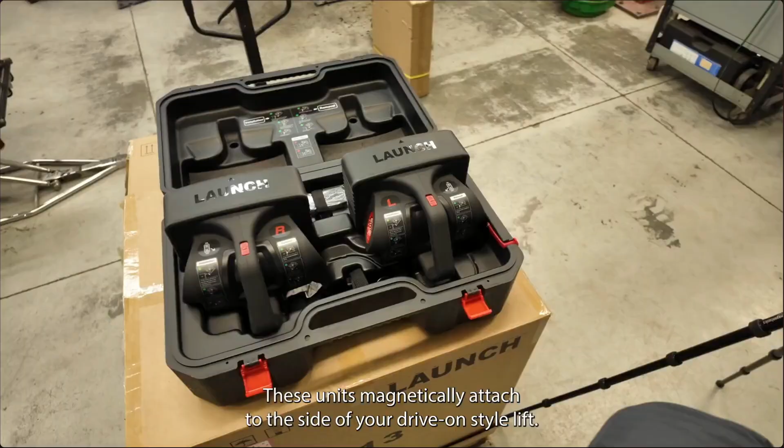Today, we're unboxing the Launch X613 mobile wheel aligner, which comes packaged together in 3 boxes. The first box contains 3 parts. First, we have the hard case with the main unit. These units magnetically attach to the side of your drive-on style lift. They are self-calibrating and wirelessly connect to your Throttle 3 or 5 tablet.

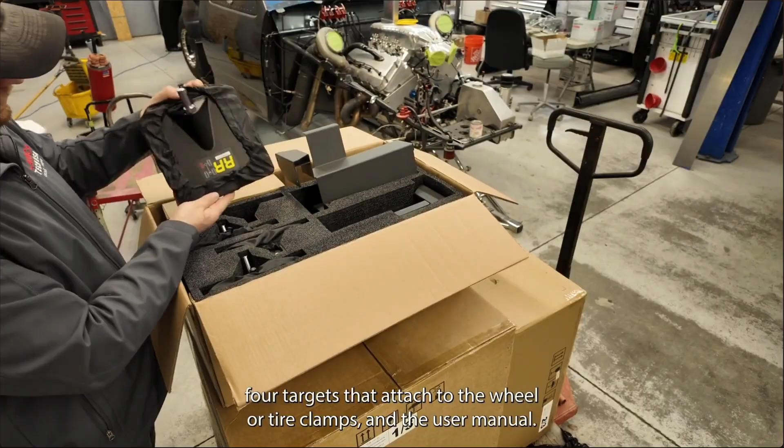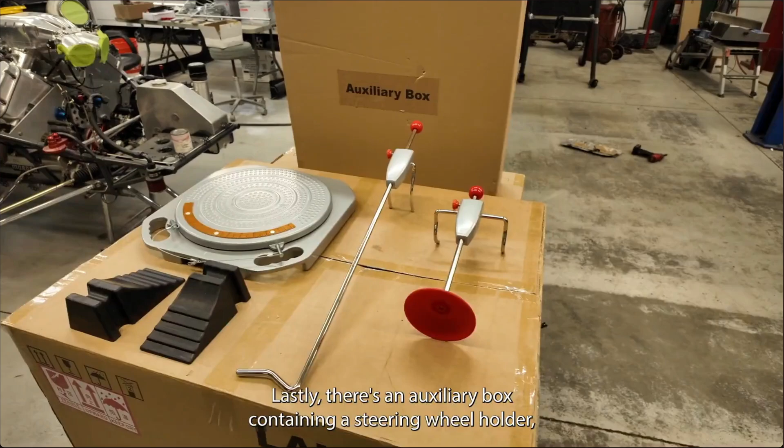The next part contains wall mounts for the camera units, 4 targets that attach to the wheel or tire clamps, and the user manual. To wrap up our first box, we have our tire clamps with 2 size adapters and corresponding wall mounts. Inside the second box, we have the wheel clamps with their corresponding wall mounts. Lastly, there's an auxiliary box containing a steering wheel holder, brake pedal depressor, wheel chocks, as well as the 2 turn plates. Now, let's talk about what makes the X613 stand out.

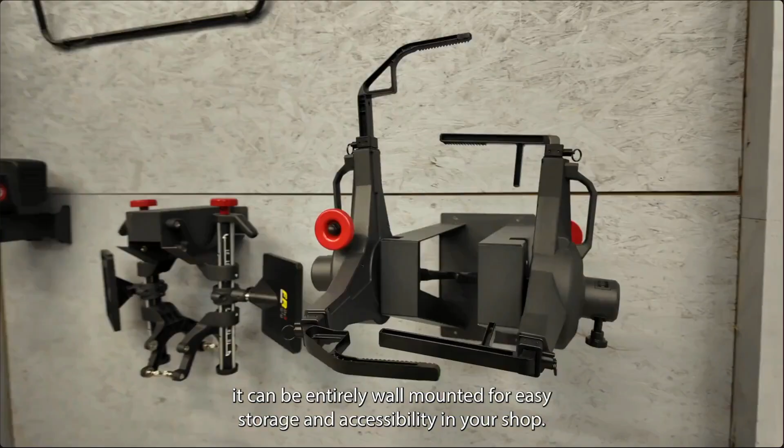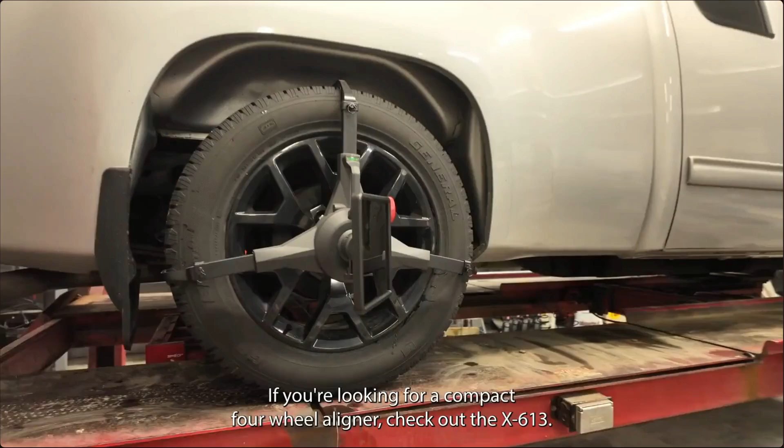When not in use, it can be entirely wall-mounted for easy storage and accessibility in your shop. Easily put away the main camera units, wheel clamps, and tire clamps. Alternatively, the main unit can be stored in its hard case designed for easy wiring, so you can continue charging it even when it's put away in its case. So, there you have it. If you're looking for a compact 4-wheel aligner, check out the X613.

So as you see, that unit comes with pretty much everything you need to do an alignment. It comes with two cameras, one for the left side, one for the right side. It comes with two sets of clamps. It comes with four rim clamps, also referred to as 4-point clamps. They have the clamps that grab onto the edge of the rims, and then it comes with four tire clamps, also referred to as 3-point clamps.

Comes with four targets, the mirrored targets, just like you see on other alignment machines, that go at each point of the wheel, the right front, the left rear, and vice versa. And they're marked accordingly because they have to go in a specific spot. In addition to that, it comes with two turntable plates, and it comes with a steering wheel lock and a brake pedal depressor.

It also comes with the Throttle 5 scan tool, which by itself is a $5,000 tool. It's our top of the line scan tool, which runs the mobile aligner. You have to use a Throttle 5 with this unit. You can't use any of the other scan tools that we sell. It has to be a Throttle 5, and the reason for that is the Throttle 5 has dual band Wi-Fi, so we have two channels of Wi-Fi on there.

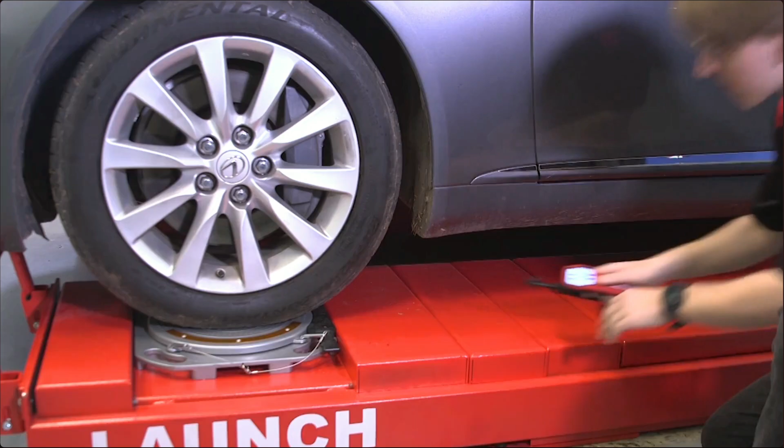He's going to show us a little bit of a tool here. This tool is for checking tire depth. So we're going to go ahead and do a tire depth check. Go ahead, Harrison, let's start it off if you would. Harrison's going to start off with the left front tire, so the driver's front, and he's going to quickly get us information on all of the tire tread depths very rapidly, and we're going to integrate it into the tire report.

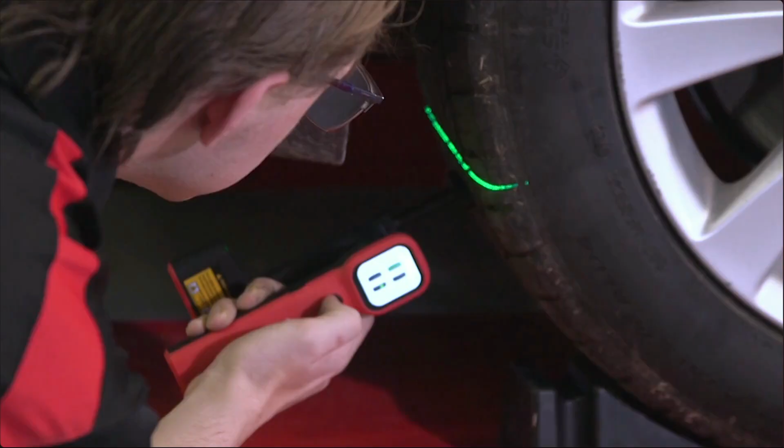Now remember, an alignment problem doesn't always show up as tire wear, but it definitely can. So looking at the tires will give us a good idea if we have a scenario where we need to do an alignment. And now we're going to get ready to start with our alignment. So Harrison, if you'd come over here real quick, we need to identify the vehicle first, of course, because you can't remember all the alignment adjustments.

So Harrison, if you would, let's pick this vehicle. Asia, if you notice, he picks. And then he's going to pick the Lexus that this is. So he's going to scroll down to Lexus. Notice how easy it is. Then he's going to pick the right Lexus model of this particular vehicle. He's doing that right now and picking, of course, the year. Now that will be implemented into the service report.

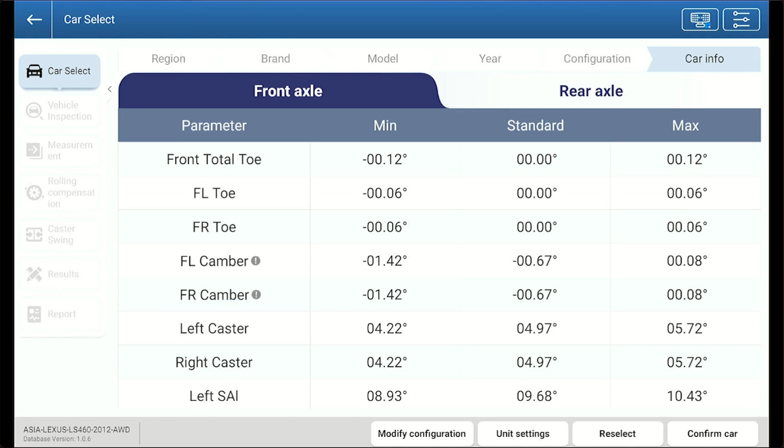So the service report itself, when we're done here, is going to show the type of vehicle. So is it an all-wheel drive? Absolutely. We're going to confirm the car. Here's all the alignment measurements, as you can see on the screen, including diagnostic angles. Now, we then have tire inspection right over here. So let's go over into tire inspection.

We're going to hit next, and we're going to import the information from our device that measured the tire. If you notice, it's populating from our test. So all of our tire depth information, as you can see on the scan tool, has been programmed in so we can get a look at it. So we're going to hit next. So we have all of our tire information, which is great.

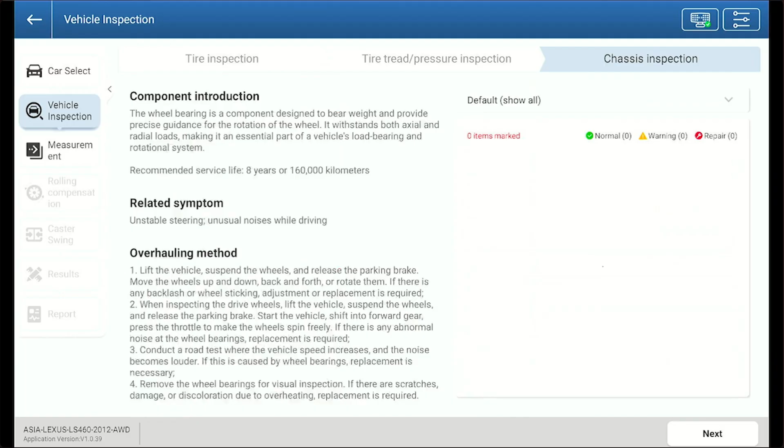We can do a complete inspection on the vehicle as far as parts and put it down in the record for the customer. We're going to go ahead and hit next in this particular case, and here's your alignment procedure.

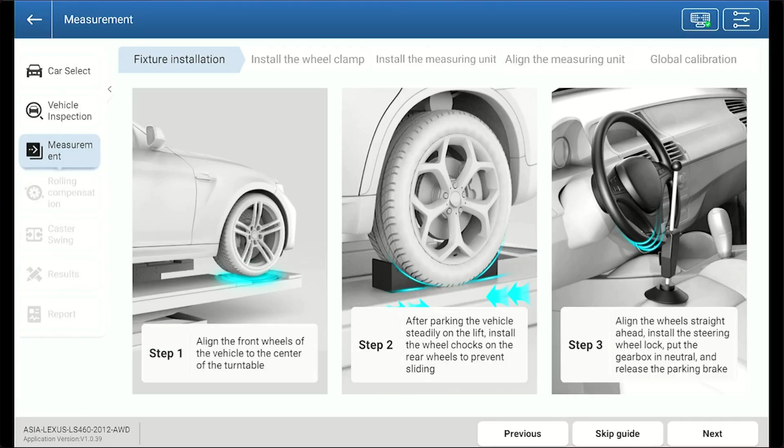Now, if we notice, the first thing is align the front wheels, so we're going to pull it on the rack. We're going to line the front wheels with the slip plates right here in the middle, and we're good there. And then we're going to, of course, go to the next step, and we're blocking the rear wheels, which has been done, and then we're going to lock the steering wheel.

So Harrison's going to grab the steering wheel lock and lock the steering wheel real quick, because we're going to go ahead and do a run-out check like all quality aligners do, but this alignment run-out check is going to be done very rapidly. So I'm going to go ahead and hit the button. Now we've got to put the targets on, and then we're going to set the run-out. So Harrison is going to get the alignment wheel clamps and the targets, and we're going to get those set up, show you how easy those are to set up.

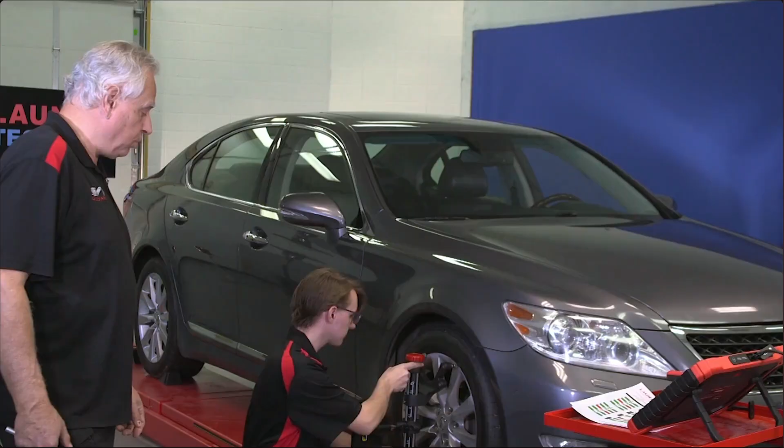So we're going to start basically with this right front over here. And if you notice, he's going to go up to the wheel. You can set the clamp to the tire rim size initially. So he's preset it, so notice how close he is. He's going to push in very hard on the clamp. He's going to have it centered straight up and down, and he's going to tighten it down. And then he's going to give it a good yank to make sure it's on there. Notice how well they fit.

He's going to go to the right rear now, and then he's going to, of course, do the other two on the opposite side of the vehicle. So we have 4 wheel clamps to put on. They're all put on exactly the same way. Now remember, there's an optional clamp with 3 positions that go on the tire. Makes it a little quicker, but this clamp is inexpensive and they work extremely well. They're very repeatable also.

And then, like I said, we're now going to take the next step, which is to put the actual head units on. And you'll be a little surprised where they hook up, because they fit right in the center of the car. Now, the nice thing about that is, of course, the beams have a very short distance to travel. Not a lot of things get in the way of the beams, so very reliable as far as that goes. Now, these sensors do not have any kind of wiring on them. There's no wire connection, there's no strings, etc.

So Harrison is going to grab the sensor that fits on this side. Harrison's going to insert the sensor. It's magnetic, if you notice. He's all set. He's going to turn the switch on. We're good. Got a green light. We're going to do the same thing on the other side. So he's putting that one on the same exact way. Once again, they're magnetic. The nice thing about this is it's a mobile aligner also. You don't have to do it on a nice rack like this one.

So Harrison, come on. Boy, you did that awfully quick there, guy.

So go ahead and hit next. So we're ready at this point. We've got the sensor on. It's telling us how to do it just to make sure we know it. If you notice, it's step by step. Tells us to make sure that we have a good path. So we're ready to go on. So Harrison, you ready to keep rolling? So go ahead. We're going to hit start calibration now. Since we've just put everything together, it's going to do a calibration to ensure that the calibration is correct. We are ready to go. So Harrison's going to hit next.

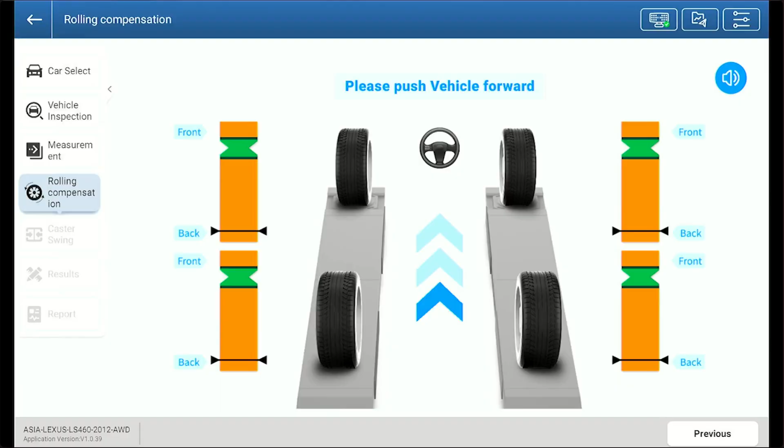So he's going to push it back to where it was, and this does a compensation to make sure that all the sensors are reading accurately as far as the position that we placed them at. Notice we're in the green area now, and it's got a check mark, and we're ready to go. He's going to put the wheel chock back in, and that is basically our rolling compensation procedure.

So now we're going to go ahead in this particular case and remove the steering wheel lock, because we're going to do a caster included angle measurement, which is very important to make sure that we're in good shape as far as this alignment goes. So we're going to go ahead and unlock our steering wheel. And when we unlock the steering wheel, we're going to go ahead now and turn the wheel.

Since we're turning the wheels, we're going to basically remove the actual pins in the good old turn plates, because the turn plates have to be able to move so that we can do an actual alignment examination. So I'm going to hit next. It gives us all the instructions on the screen, if you notice. It's telling us, please turn the steering wheel to a straight ahead position. So we want the steering wheel straight ahead. There we go, straight ahead, as you can see on the screen.

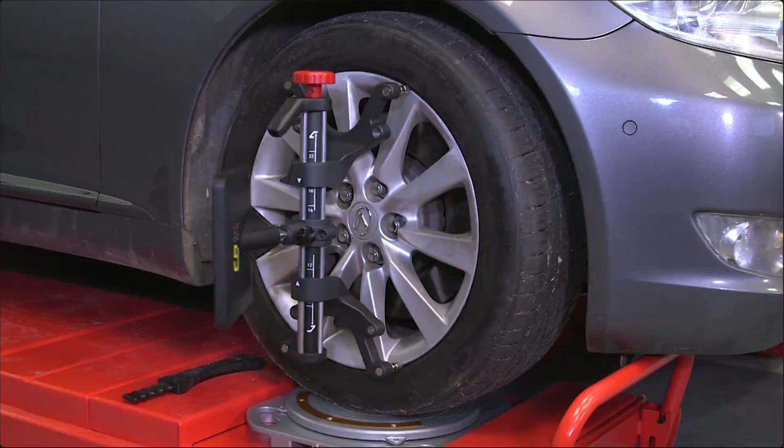Now it's telling us, please turn the steering wheel in any direction. You can pick either left or right. So Harrison's going to go all the way over to the left in this particular case. And he's going to get into the green area and go just beyond it. Now it tells us go to the right. So he's going to bring it back to the right. It's going to take the reading and then return the steering wheel to the center straight ahead position. Once it does that, we're all set there.

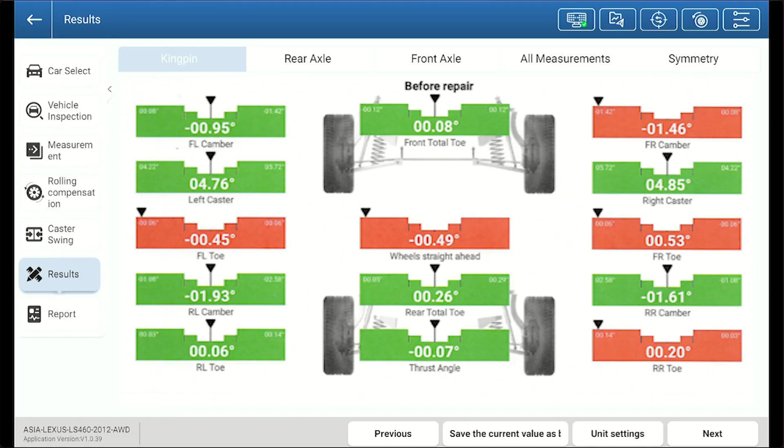And believe it or not, there's our alignment reading. There's our measurements. So we do have a situation where we need some alignment work done here. If you look especially at the right front camber angle, we've got a concern and we need to make some adjustments as far as that goes. We are ready to go at this particular point.

Harrison's done great. What do you think of your first time doing an alignment check? It was really easy. Yeah, real easy.

Now, here's the interesting thing. Harrison also hit the print button for me, and look at this. I've got the full copy of the exact alignment printout here. I know not only the alignment angles, but I also have all the adjustable angles on here, and I have the fixed angles for diagnostic purposes. I can tell if I do have a bent strut, or a frame with a problem. I can tell if one tire is set back because the car was in an accident or we hit a big curb maybe. So all of that stuff is there.

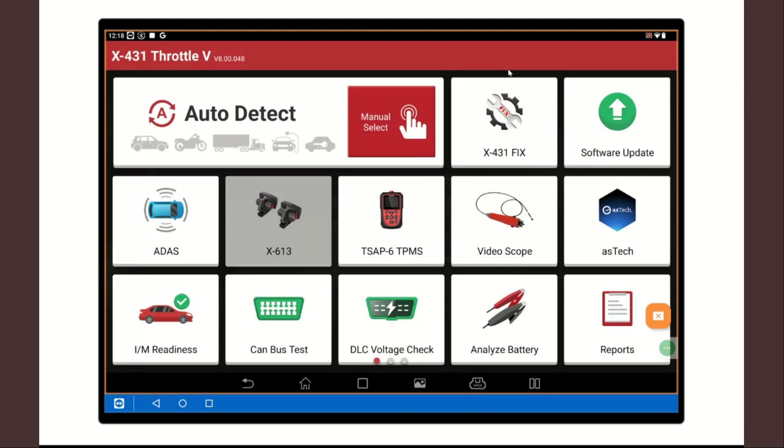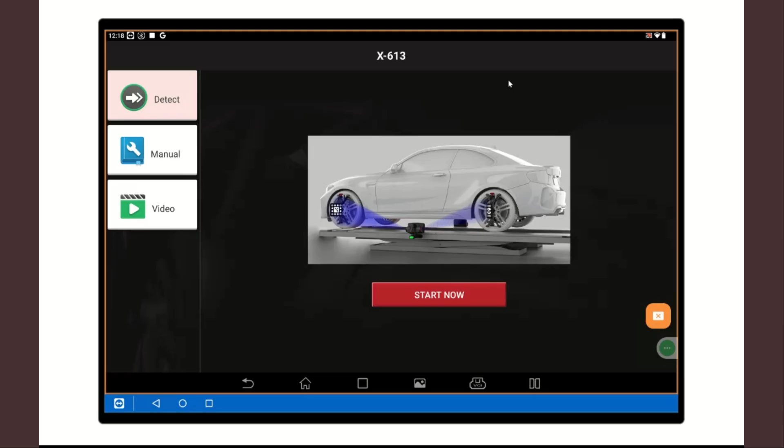So we're just going to go ahead and click that X-613 app. It's then going to load, right? And there's information in here where you can see the unit, learn how to do it through videos, enter the manual. But I'm just going to go ahead and hit start now. And I'm going to load demo mode. And that's going to take us into an alignment.

So the very first thing is selecting which vehicle you are working on. It's pretty simple. Asian car, that's your Hondas and your Toyotas, your Mazdas, and whatnot. European car, VWs, Audis, Porsches, Mercedes-Benz, BMWs. USA cars, that is literally Chevy, Ford, Dodge, and whatnot. Even if you have a truck, it's going to be listed under car. So I'm just going to click USA car.

All right, so it's going to bring up, and you'll see I have a completely unlocked tool, so you see brands that you've probably never heard of if you're in the USA up on the screen. You'll see Ford trucks, Chevy trucks, and in most cases, even in the case of an alignment, if I click under Chevy trucks and 17, you're going to see stuff that you might not consider a truck, like an Equinox. So if it's not an actual car, it's probably going to be under trucks.

So I'm going to go back here. Now cancel back to car select. So go back to demo mode, USA car. Again, multiple stuff in here. You can pick whatever brand you've got. In this case, I'm just going to click Ford. I'm going to click the vehicle that I own. Oh, there we go.

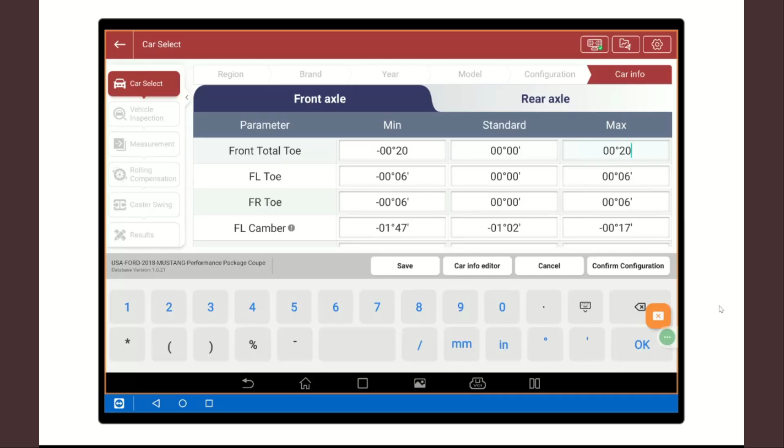Now it's 20 minutes. And I can go over to the other one and do the same thing. 20 minutes plus or minus. Maybe that's the new spec because of the work that's been done. You can then also save this. If I hit save function, and let's say this is Dave Johnson's Mustang, I can punch in Dave Johnson's Mustang, and then hit OK.

And now every time he comes back, I can go in and select that configuration, so I don't have to enter this in every single time. So pretty cool here.

And something that I learned last month: we had a customer ask us about an EV brand, fairly new to market. They haven't been around terribly long and don't have a whole lot of models, but he wanted to know if we had coverage with the aligner for that particular model. As I looked into it, we did not. It is not loaded in there yet. We're constantly adding models to the software for coverage.

But in this case, I said to him, do you have any way of knowing exactly what the specs would be? Do you have access to service information? He says, yeah. And I said, well, you can do that then, because if you go into modify configuration, you can enter all the specs in there, save it as a custom configuration, and then load that.

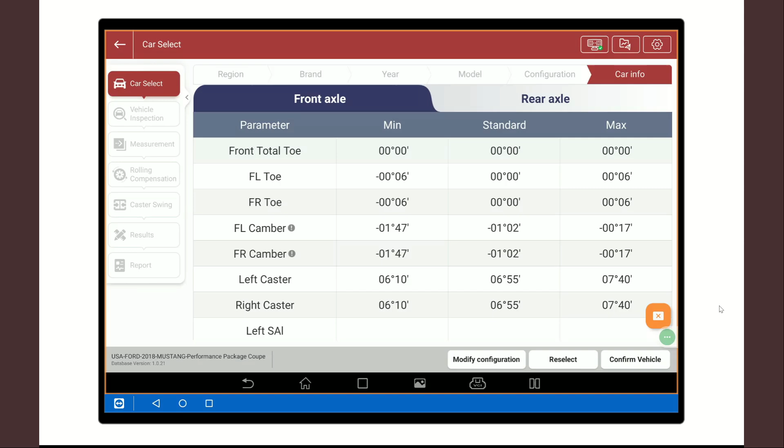And then there you go. You actually have the spec. So even if there isn't actual coverage for that particular model, if you have a way of getting the factory specs, assuming that it is not a modified vehicle, right, lowered, lifted, whatever, then you could actually go in there and do that information, right? So pretty cool. So in this case, we're just going to confirm that this is a standard old Ford Mustang.

So the next thing that comes up is kind of what some of you guys might have seen, which is, on the video Tom did, he was using the Treadmaster, where you can actually go in and scan the tires using our Treadmaster 2.0. It'll actually take tire depth readings digitally by sending an LED light through the tread pattern and then measuring the depth from the tool and inputting it into the inspection form.

You can also add pictures. Let's say it had a bubble on the sidewall, or the tire was worn so bad that you saw the steel belt, or it had a nail in the tire or something. You could actually take pictures of that and add it in to the inspection report. So, pretty important. There's no better time to sell tires, right, or suspension work, which we'll get into in a second, than when a car is in for an alignment, right, and make sure that everything's good.

Now, let's say you don't have the Treadmaster. You can actually go in there and just enter this stuff in manually. If you're just using an old manual gauge, right? I got one actually sitting right next to me right now, just an old school, 32nds of an inch manual gauge. You go in there, you can change the number of grooves that you see.

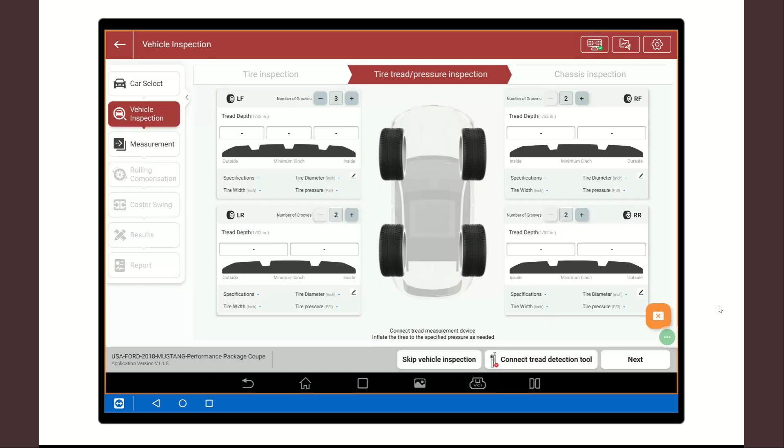So, most people want to do outer, inner, center, right? But let's say you're working on a bigger truck that had steer tires with four grooves in it. You can change the number of grooves that you're looking at. You can do all this kind of stuff to it, right? Manually enter that in and then hit next.

Now it brings you up to a chassis inspection, right? Anybody that does alignments knows you need to do a proper shakedown, right? You need to shake the vehicle down, check it for ball joint play, check it for tie rod end play, right? Check it for sway bar links and anything in the front end, control arm bushings, all that kind of stuff. So again, as you're going in, you can click this stuff off, bring up the front suspension, right?

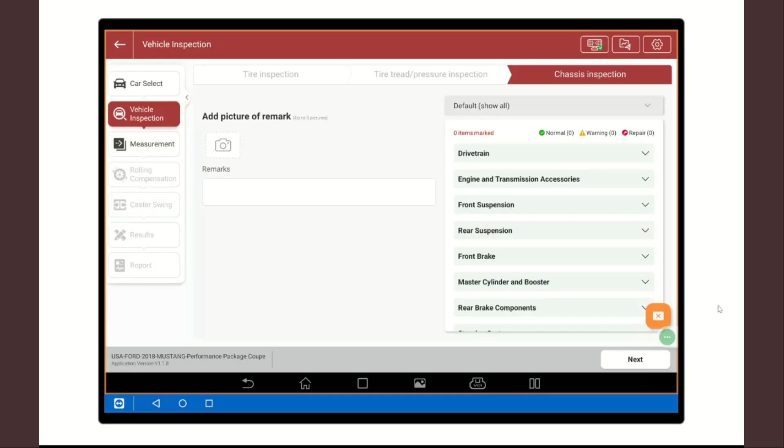And mark it, right? That it's good, it needs service, right? If we go ahead and we mark it with that check mark, that means it's good. But let's say we have a problem, we can mark it as a warning. We see something going on there. Let's say it's completely cracked or something, we can mark it as red and say, hey, this needs to be done. You can also, again, at that time, add pictures. The scan tool itself actually has a front and rear camera that you can walk up and take a picture of the concerned items and add it into the report, right?

So, everything in here is in there. Again, I'm in front suspension. Let's say it has an engine mount problem, right? You can go in there, click under engine and transmission accessories and mark that down as well. So anything you see, steering system, right? Anything you see going on that needs attention, you can actually mark it in this inspection.

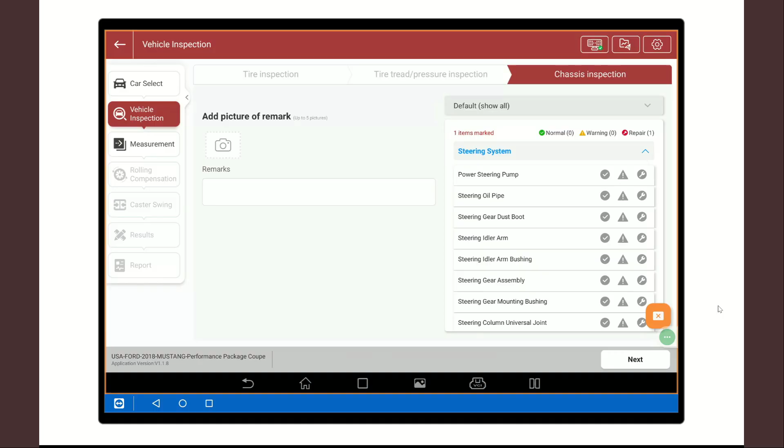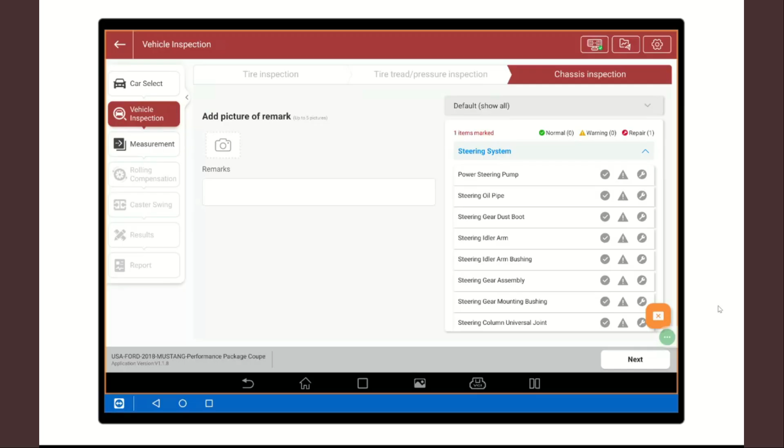At the same time, you don't have to do it at all. If you just keep hitting the next button through the tire, tread, and pressure and chassis inspection, it'll just keep going. Like if you already use your own DVI in some way, it's not required. It's just an option to help you guys out. And it can be exported as a PDF file. It can also actually be sent to the customer as a QR link for them to open up and look at it. And then they're going to get the pictures that you took and the tread scans and all that stuff if you're doing it that way.

So I'm going to go ahead and hit the next button. And again, this is what I talked about, where literally if you can just follow the directions, you're in good shape. So if you happen to be using this on an alignment rack that has turntables, you're going to want to pull that vehicle up to that spot, right? And put it on the center of the turntables, and you're going to go ahead and chock one of the rear wheels to prevent it from moving.

Now, the kit actually comes with a set of chocks. And probably the only bad thing that I have to say about this unit is the chocks that we have been sending out are probably not the best. First thing that we found out is that the angle is too shallow. It is very easy, when you're doing the roll comp, to push it back and then push it forward and then roll it up onto the front chock, and then you actually have the wheel slightly off the ground, and it's changing. It can give you some false configurations.

There's a couple of little fail safes you can do. On the top of the targets is a level bubble, and if you put it on the center of that level bubble when you set up and when you do the roll comp, if it's back into that bubble, then you're back in the exact same spot that you started, right? But if your bubble's off, then you want to look and see, are you on the chock?

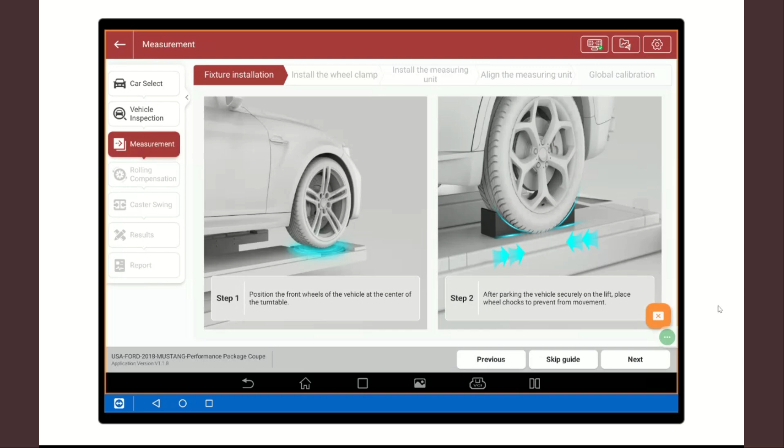So we are getting different chocks to start sending out with these units that are a little more robust and have a little bit of a steeper angle to stop that from happening. So if you already have a kit, you might already know this problem, but get yourself a different set of chocks to use with that. So I'm going to head to the next button.

So here's where you're going to go ahead and install the targets, right? The targets go into the type of mounts that you're using. Again, we have over tire mounts, commonly we also refer to them as 3-point clamps, and we have 4-point clamps that clamp onto the rim. Again, you get 4 of each of these. It's your choice which ones you want to use. In some cases, the vehicle will make a decision for you, right?

You get some vehicles that are possibly lowered or something like that, and the tire clamp style ones won't fit on. You need to use the rim clamps. And maybe you prefer using the rim clamps, but you get a vehicle that has very fancy rims on it that doesn't have a lip on the edge for the rim clamp, you might have to use the tire clamps. So put those on and make sure that the targets are in the exact spot they're supposed to be. Again, the targets are marked FR, FL, front left, front right.

So we are actually also going to change that because we've had some people, if you're standing in front of the car and you hold your left hand up, right, technically that's the passenger side of the car. We've had people say, well, no, I'm putting them on the left side because they're in the front of the car. So we're going to have them say driver's front, driver's rear, passenger front, passenger rear, right?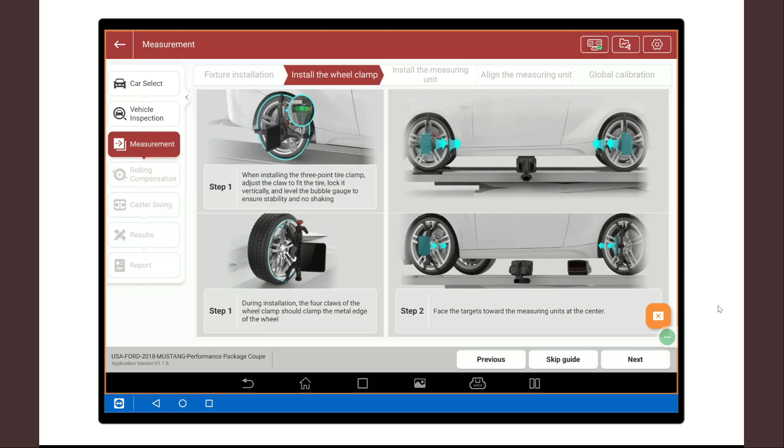Or put a sticker on it, kind of like some of the alignment equipment has, where it has a picture of the steering wheel, and the location closest to the steering wheel signifies which wheel that goes on. So once the targets are in place, right, we are going to install the cameras. You're going to install the cameras roughly equally on both sides of the car.

Now, what's unique about this is the camera placement, right? It goes in the middle of the car. So it's very important when you're setting those targets up on the wheel that the mirrors on those targets are actually angled towards the center of the vehicle. It's the opposite of most of the more common aligners you've used, where they both angle towards the front. In this case, the rear one has to angle towards the front, but the front one actually angles towards the rear.

You also want to set them at a slight downward angle, since the camera is lower than the targets, right? If they don't connect, you'll see that they're not connecting when we do the calibration. I'll show you that in a minute. But a little bit of a pitfall that we see is guys put the targets facing forward, kind of out of habit, really. So once that camera is installed on the lift, there's a little red power button. You want to slide that forward, install the other side, slide it forward, right?

Typically on a lot of cars, if you're using something like a sedan, the B pillar, the gap between the front door and the back door, there's a little arrow on the top of the camera. Just put that right in that gap and do the same thing on the other. There is a little bit of wiggle room on the side to side viewing because these cameras need to see under the vehicle and see the other camera on the other side, right?

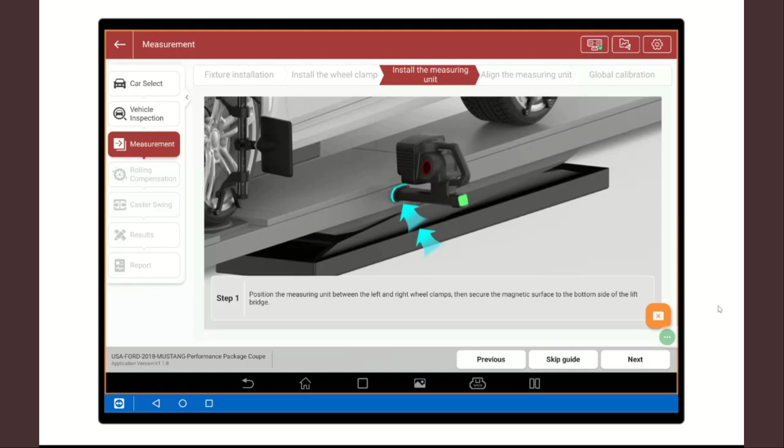The left one's looking for the right and the right one's looking for the left. So you want them to be as centered, as close as possible. But again, it doesn't have to be exact down to the millimeter. There is some wiggle room there. So once we install those cameras, we're going to make sure that they are seeing each other by doing the

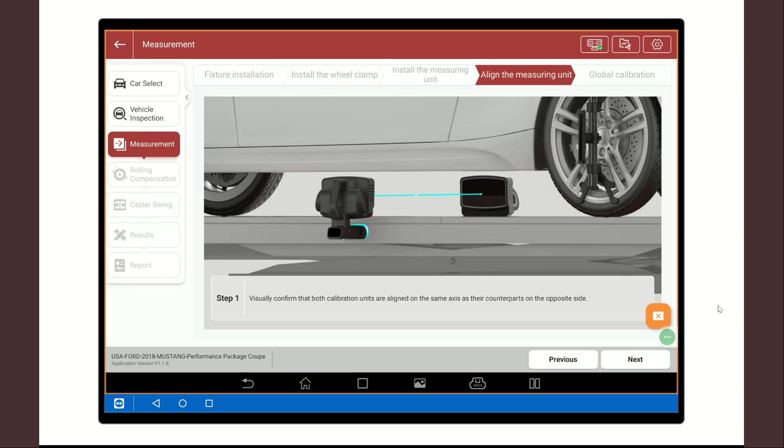calibration. So as we go to this next screen, the cameras are connected. The scan tool sees the cameras and they are connected to each other. So the cameras are reporting back to the tablet at this point. Now we need to know, do we see the targets at each wheel? So you're going to hit that start calibration button, and it's going to start calibrating, and boom, you're going to get all the readies.

All right. If everything's good to go, it sees every target, you're going to see green check marks and everything saying ready. If for whatever reason it's not seeing one wheel or two wheels, it's going to have a red X and say not ready. And that's going to be your first clue that something's not right. Could be the angle of the mirror on the target that you need to change. Could be the position of the camera, but look around and make sure that things are right.

We've had some troubleshooting calls. And not to embarrass somebody, but they're like, I can't get these two targets to connect, and we're like, okay, which ones? The one on the front right and the one on the right rear. And then we come to find out they've got the targets in the wrong spot. Underneath that mirror, when you look at these targets, it's a smooth black surface, but underneath there is like a checkerboard pattern, and that checkerboard pattern has a very specific pattern to it for the right front.

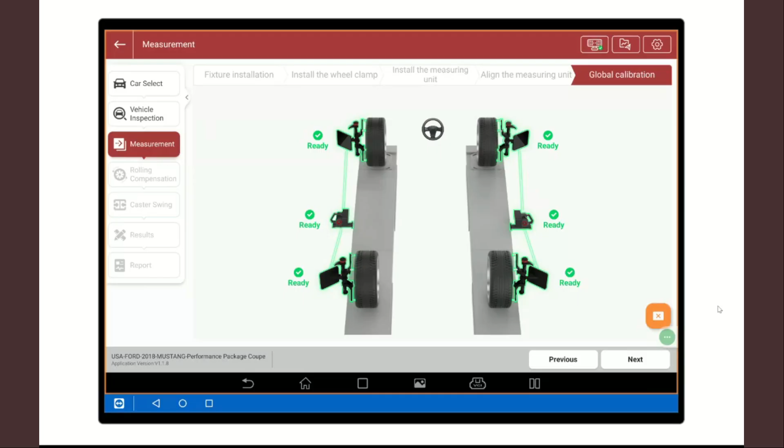I'm going to go ahead and hit next now that everything's calibrated. So now it's going to tell you to go ahead and do the rolling comp.

So you're going to want to roll the vehicle backwards and roll the vehicle forward. So I'm going to go back again on this, and I just want to talk about this for a second. This is a very important step, right? Making sure that the steering wheel was straight ahead beforehand, and then rolling the vehicle back. The rolling the vehicle back is the very important part too.

You're going to want to remove one of the chocks from the wheel, and go ahead and roll that vehicle backwards, roll that vehicle forward. But how you roll that vehicle is as important as anything. Grabbing the front bumper or the wheel well and pulling on the vehicle backwards and then pushing it forward is not something that we recommend. And really, it's not something just unique to our aligner. It's just in general, because you are actually pulling down the body, you're adjusting the suspension.

The recommended way is to actually roll it by the wheel or the rim. Now, I would really recommend, if you have the capability, to do it by using the tire, I should say, because if you use the rim, we've seen it where guys get their fingers jammed up against the caliper or something like that, and not a happy situation. So you want to roll it back by using the tire. If you don't have the ability to roll that vehicle that way, ask for a friend. Get a guy in the shop, say, hey, can you roll the driver's side while I roll the right side? I need to roll it back.

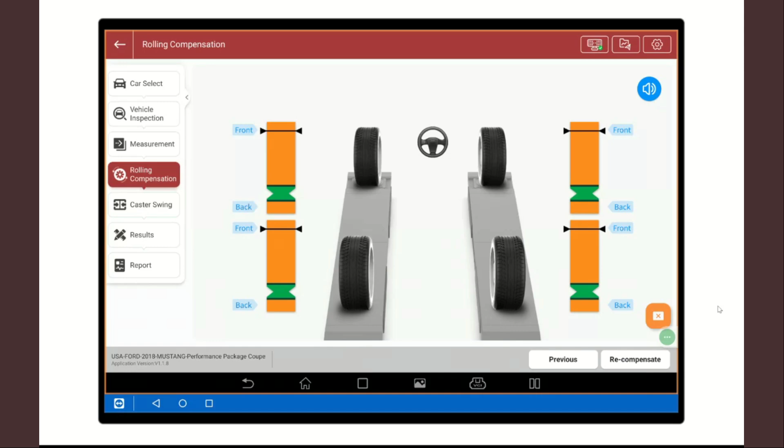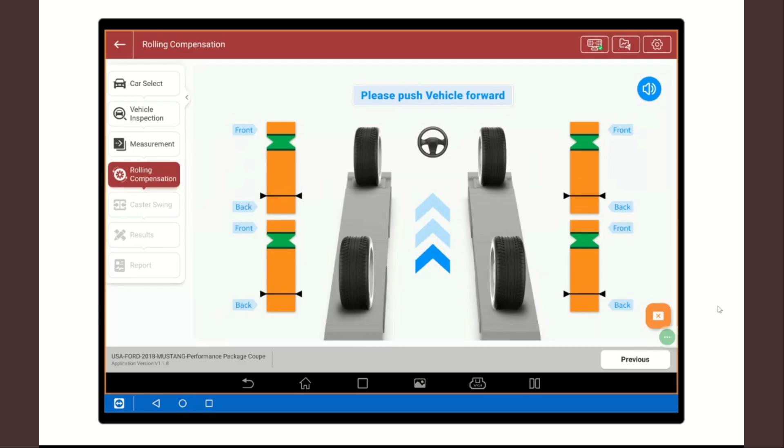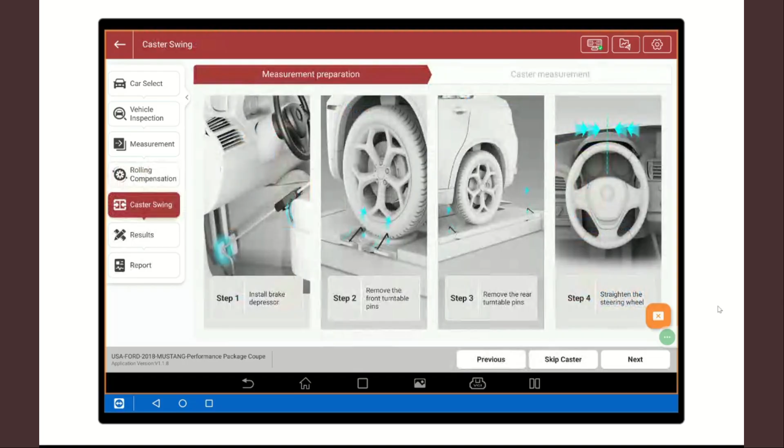So I'm just going to go ahead and start that compensation again because I just wanted to get that out. So you're just going to roll it back till you get in the green. It gives you an audible warning. Roll it forward, and it gives you an audible warning, gives you a check mark, and says, yep, you're good to go. Again, you might want to take a look at those level bubbles on the top of the targets and the clamps to make sure that they're back in the right spot.

You're now going to install the brake pedal depressor. If you have pins on your turntables, you're going to want to pull those, which you should, because turntables should have pins. And if you happen to be on a lift with rear turntables, you're going to pull those. At this point, you want to straighten the steering wheel.

Now, this is where this machine gets interesting, because this is assuming that you're using a lift with turntable pockets, like a standard alignment lift that has those pockets on it. You can use this on a regular drive-on lift. It doesn't have to have those turntable pockets, and I'm going to show you that in a second, because there's another step that has to be done. Remember, this unit comes with turntables. So again, you want to follow every one of these steps. Brake pedal depressor, pull the pins on the turntables front and or rear, and center the steering wheel.

This is very, very important, this straighten the steering wheel portion. So what we really recommend is starting the car and turning the steering wheel and going what we call big to small. So you're going to make big wide turns. You're going to go like 9 to 3, 9 to 3, 9 to 3, and then you're going to start slowing it down, 10 to 2, 11 to 1, and then tiny little adjustments, and center that steering wheel up with your eyeballs, and then turn the vehicle back off and center that steering wheel. That's going to be very, very important.

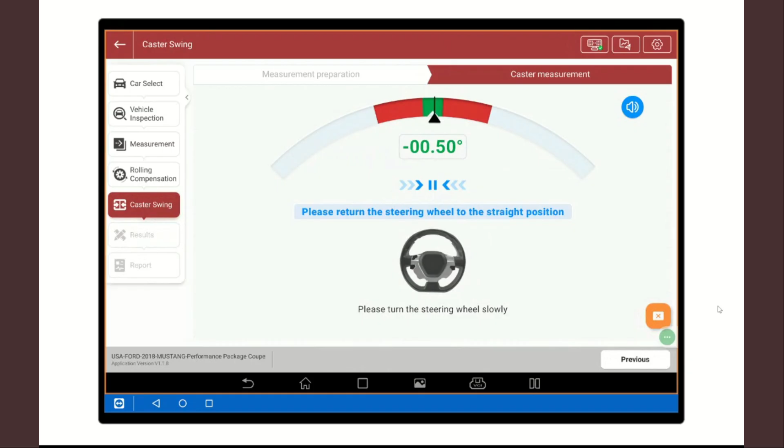So when I get into this situation here where we straighten the steering wheel, now it's going to pull up the caster swing, left, right, and then back to center. And you see that, I hate that it goes so fast, it gives you that steering angle sensor measurement. So it's telling you where you are in relation to the steering wheel being centered. So you want to get that as close to 0 as you can. And again, visually make sure that the steering wheel is straight as well.

And then at that point, you're going to lock that steering wheel down using the steering wheel lock. Now I'm going to go back because I wanted to show you the procedure if you're not using this on an alignment rack that has built-in plates and pockets. So going back to this screen where, again, installing the brake pedal depressor and doing the turntable pins.

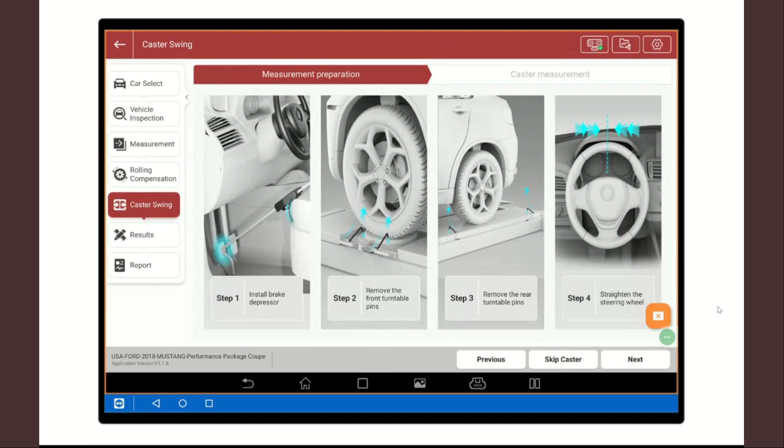So say you're on a drive-on lift that doesn't have pockets. You're going to hit the skip caster button. And what you'll notice is it just goes right to the screen for the adjustments, camber and toe on the rear axle, because it essentially did what we refer to as skip caster, which you can hit on most alignment machines.

But if you notice at the top in that red banner, there's a couple of little buttons. And if you look at that second one where the vehicle is being lifted with that up arrow, if you click under that, it's going to say the current measurement has been temporarily locked. Please lift the axle. Once the axle is fully raised and stable, click confirm to proceed with the adjustment.

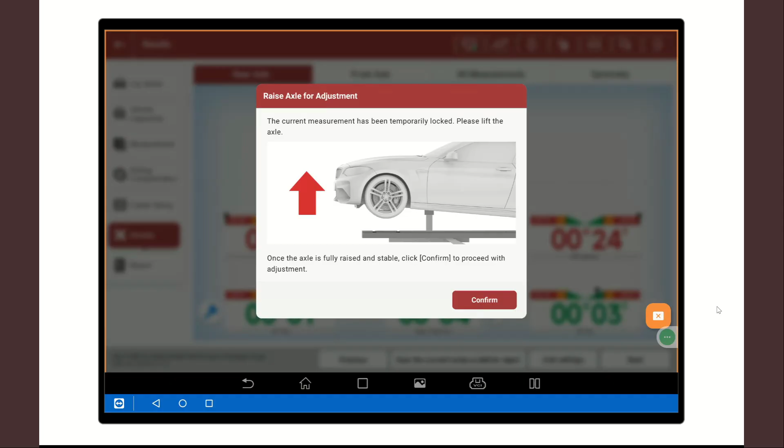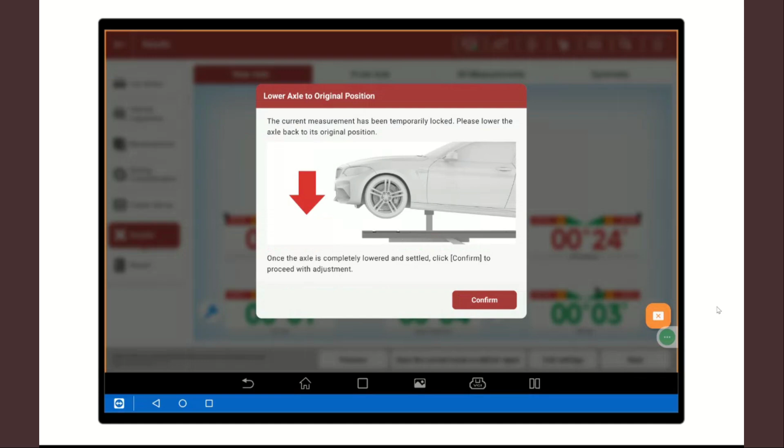So now you have the ability to lift the vehicle up. And even if your lift doesn't have rolling jacks, we've seen guys literally put a floor jack on their rack and then lift the vehicle up, and then you go ahead and install the plates, and then you go back after you're done and hit the down button, because now look what's there. We locked the specs, and now you want to set the vehicle down.

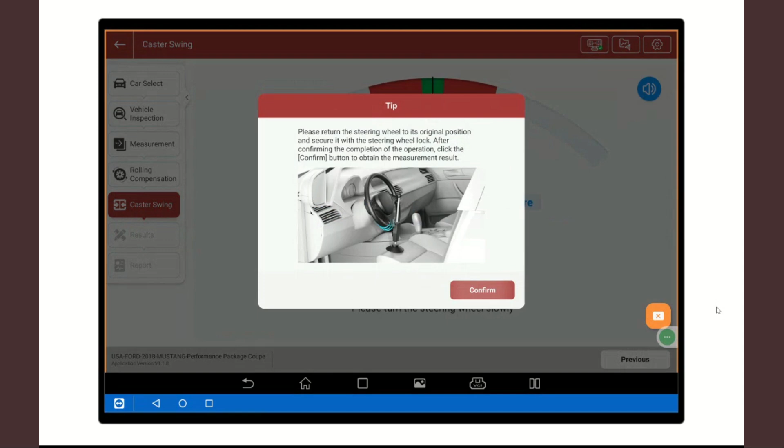So now you're going to set the vehicle down. And again, you're going to hit the previous button or caster swing button, and then hit the next button again. And now you can do your caster swing. And that's kind of where the magic happens on this machine, because you don't have to have an alignment rack. You can be using any kind of a drive-on lift or a scissor lift that has flat spots.

We don't really, I guess, advertise this, but we've actually even had people that have built their own contraptions using 2x12s. They built ramps, and then 2x12s that are like 2 feet off the ground. And they put the car up there and then they go ahead and do it. You can also use it in a pit, where you can lift the vehicle up, put the plates under there, drop it down, and then do your caster swing and get the specs.

So the interesting aspect of this machine is that it locks those specs once you do the rolling comp, and then you can slide the plates underneath. And people say, well, how do I guarantee that the specs don't change? It's really no different than other alignment machines. If you've used other brands, they have a jacked up axle compensation process, and it's the same thing.

It just locks the specs for the camber and the toe that it got during the rolling compensation, and waits for the vehicle to be dropped down. And then the machine does the math to figure out the height of the plates off the ground. So anything that changed is compensated for using mathematics inside the aligner software.

Next up is the specs. Now we have specs, and if you'll notice, you can look at them by axle. So we got rear axle. You can look at them at front axle. You can look at them all together at the same time. And in this case, you see we have rear camber off. We have front camber off as well.

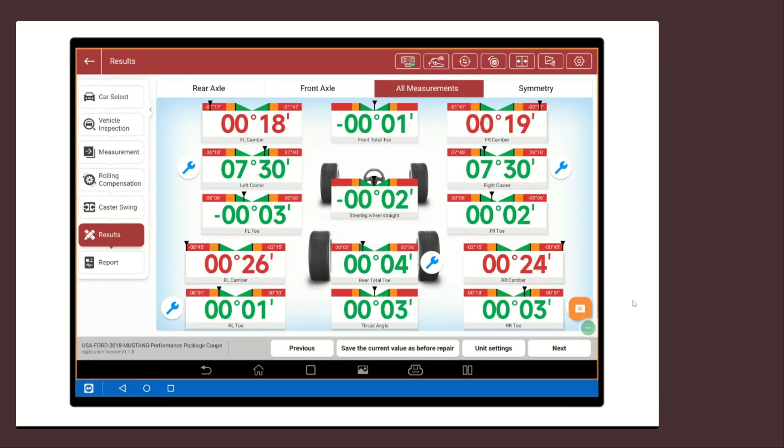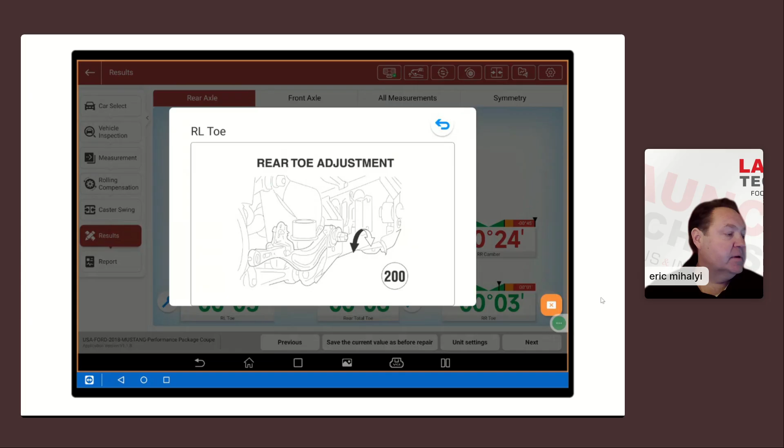So you click the rear axle and you go in there, and if you see this blue wrench light up, that's going to bring up the adjustment for you. It's going to tell you how to actually do the adjustment. There we go. So there happens to be the rear toe adjustment on this particular vehicle.

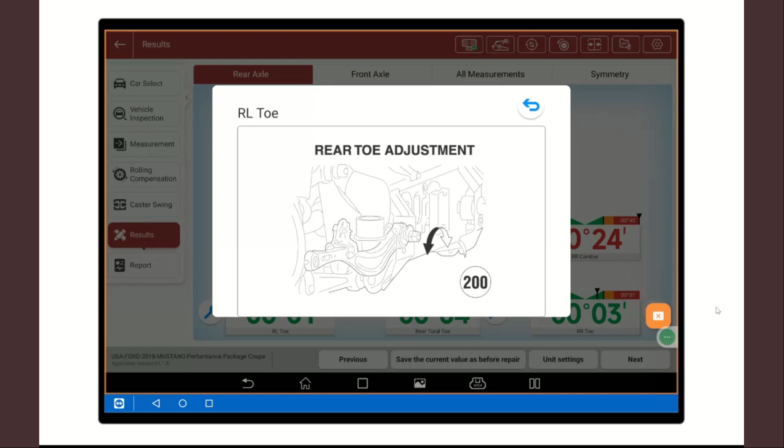So it tells you to loosen that nut on the toe link and start to turn it left or right to add positive or negative toe, right? So for any of the adjustments in there, you can actually bring up the spec on the screen.

And this is what I think is the best part about this, from a guy like myself that's done alignments since the early 90s: you now have a tablet in your hand, as opposed to trying to, especially when you're doing the adjustments on the rear axle, do gymnastics to get low enough to look under the vehicle to see the screen, or having to run out from under the car, around the car, to look at the screen.

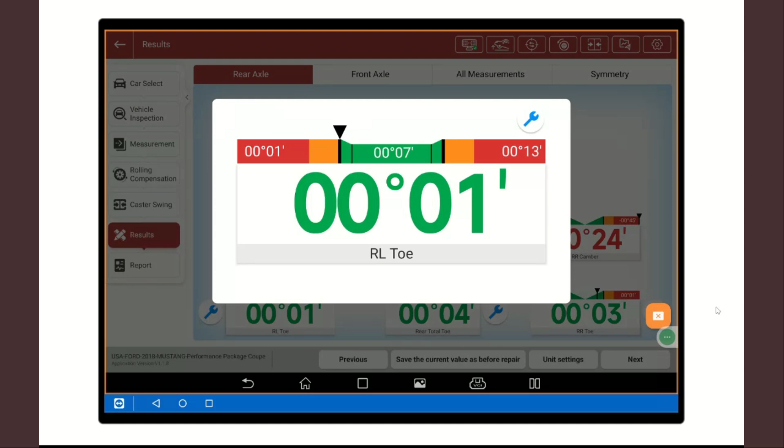One of the things we really recommend doing is, you can either put this on something like a cart and actually have it there, or the thing that I actually like to do is use some of those brake caliper hooks and hang the tablet underneath in the center of the car as I'm looking at the adjustments. And now I have this screen up and I can actually go and do these adjustments as I see them. Go over to the other side, do the next adjustment, right? So you can just go right back and boom, you're done, right?

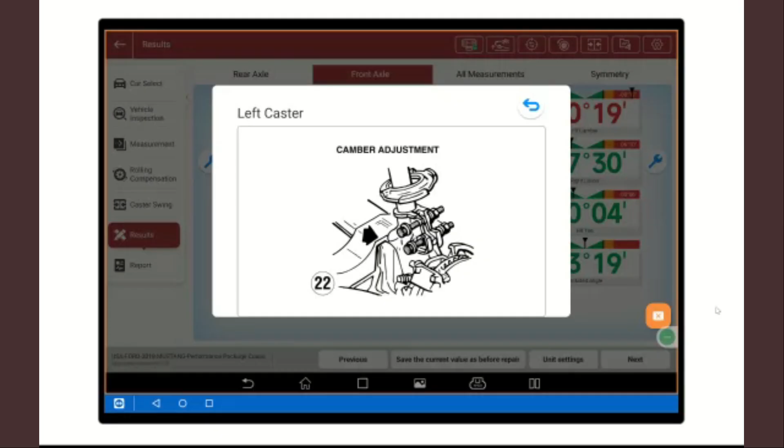So you can head up to the front axle then. Same thing. You want to know how to do the caster adjustment on this vehicle, right? You can hit that, hit the blue wrench, and there it is. So caster camber adjustment is done by loosening the bolts on the strut to knuckle. So again, that adjustment is done there. You can see that, all right?

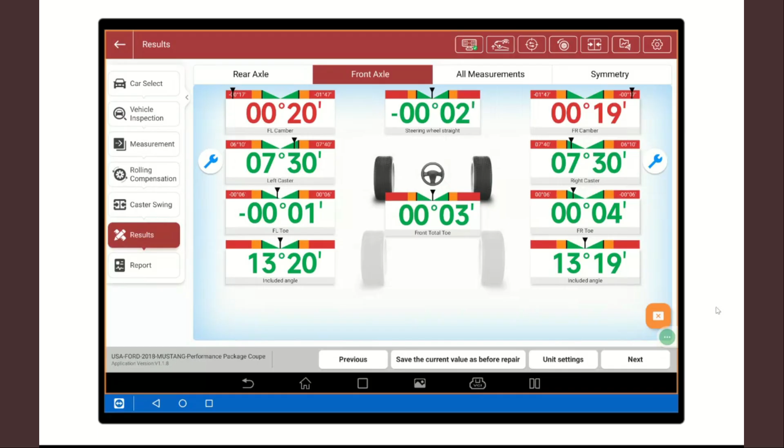Once the alignment is completely done, you can hit the all measurements button. And now you can look at this screen the way that you want to. So you can see this screen in a couple of different ways. If you want to go ahead and hit the save button, right? You can do that.

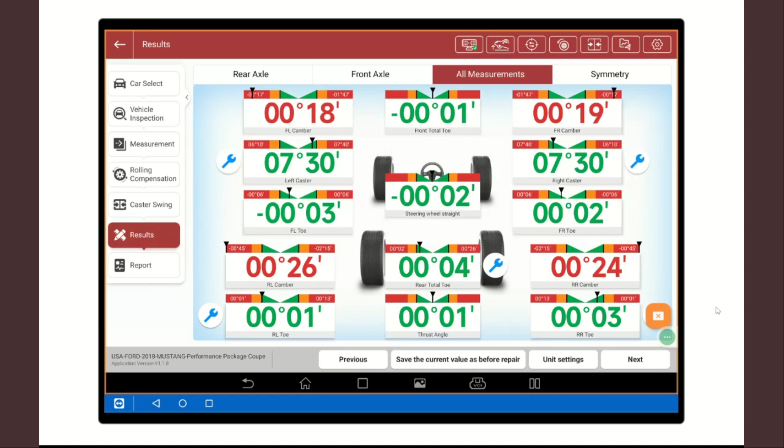One of the other cool things about this machine is that it has this tab here called symmetry. And this is really going to help you if you have a vehicle that you suspect possibly has some damage from a bent frame, a bent suspension part, a bent strut, a crooked subframe, right? Maybe someone did an engine or a transmission job in this car and it's had a pull or a drift or something since. You can look at the symmetry.

So, someone claims they hit a pothole, they hit a curb, and now they've got a problem. You might want to look at this screen and see, is your symmetry okay? Because it might need to go get on a frame machine or something. There's really nothing you can do about the alignment specs by adjusting things if the symmetry is off.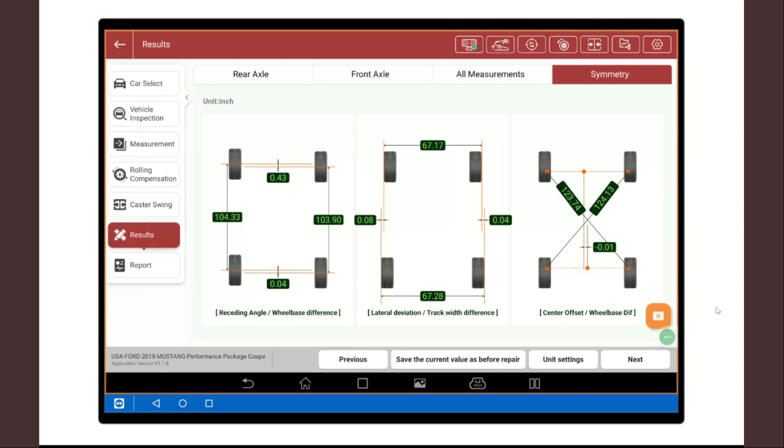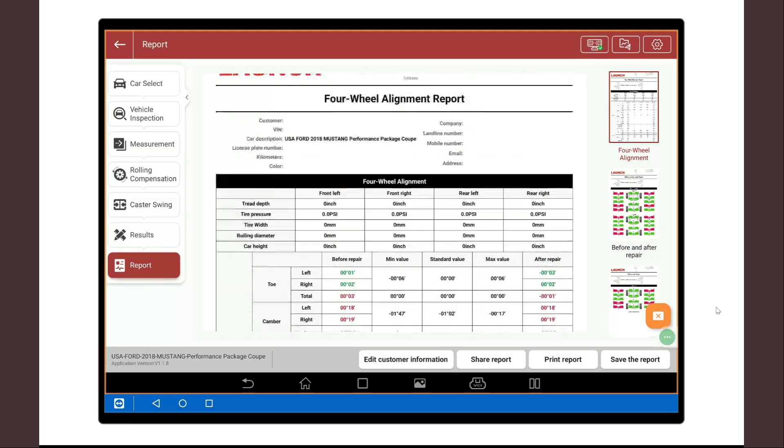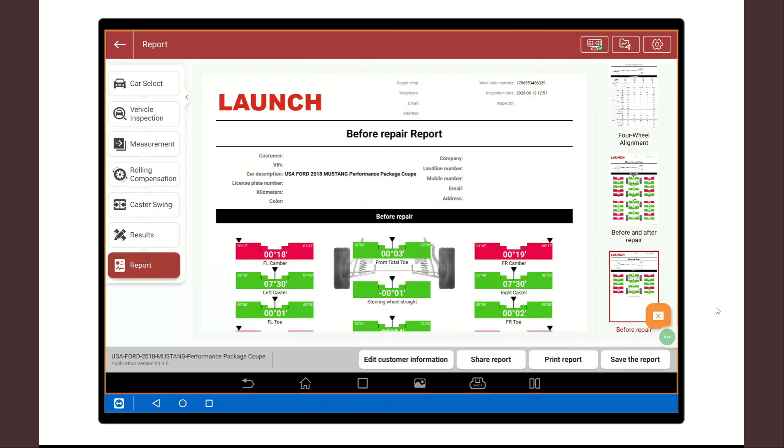I'm going to go ahead and hit the next button, and now it brings up a report. So you can have a report for your records and for the customer. You can look at it any way you want. Some people like to look at it where it's actually the specs like this. Some people like to look at it like this, where it's actually the green and the red, what they maybe are used to that other brands do, right? So you can look at it before and after, or you can just look at it before, and or after, okay? And then even the symmetry screen.

So you have the ability in this screen to actually save the report and to print the report. You can actually set the tablet up to print to a Wi-Fi printer, and you can actually share the report. So you can hit the share report button, and now you can share it either by email or by sending the customer a QR code to their phone or their email.

So I cancel, but you have the ability to do that, save it on the machine, and then you can access it from reports later from the home screen of the tablet, or you can hit print to your saved printer that's on your Wi-Fi network. So just like anything else, right?

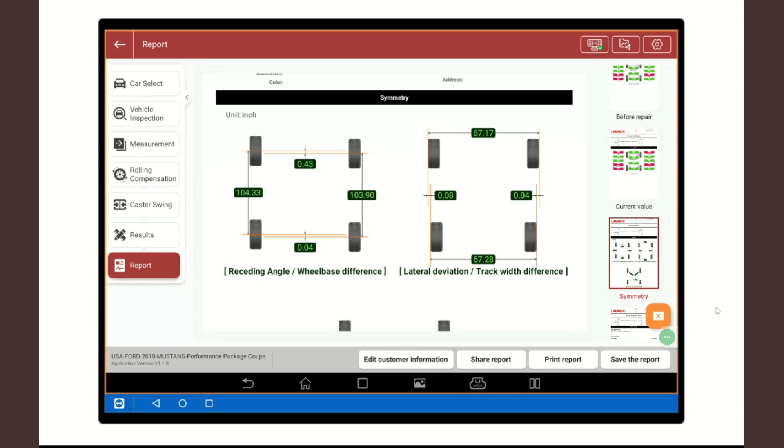So I'm going to go ahead. I'm going to back out of this screen now and go back to, you're going to unfortunately have to see me on screen now. So are there any questions? So I see a few up there.

First one, Chris Diaz: what tips would you give a tech doing their first alignment with their tool? That's an easy one. Follow the instructions on the screen. In fact, it seems like most of the time that we've had people calling in for tech help with this machine, it usually starts with the sentence, I've been doing alignments for 30 years. And it just gets to a point where it's muscle memory, right?

Because with some of the newer aligners, you don't have to necessarily straighten the steering wheel before you do the caster swing, right? That's actually done later, whether they call it wind toe, easy toe, whatever. It's very, very important with our machine that you straighten the steering wheel after the rolling comp, right? You do the rolling comp, and before you do the caster swing, the steering wheel is done. So just follow the instructions.

John Thompson asks, does the lift rack need to be level with leveling arms or level on locks? No, it does not. It has the ability to compensate for that. Now, you don't want it to be way off, but you don't have to use stands. I know some guys may have seen it in the past where they have stands you actually set the vehicle down on, and then they have leveling arms that come out on some lifts. That does not have to be done in this situation.